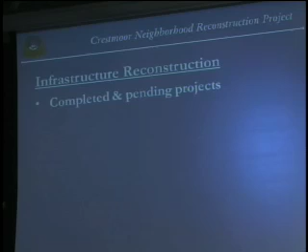Before I get into the projects, I wanted to reiterate something the mayor said. Late last year, the city council had a study session where staff presented recommendations for infrastructure improvements in the neighborhood. Subsequent to that, the council adopted a resolution confirming those improvements, reiterating their commitment that they are rebuilding the community, not just repairing the damage that occurred in the event.

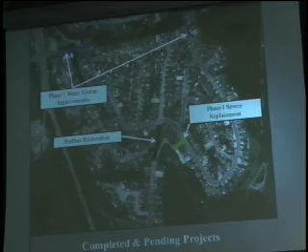So let's take a look at some of the projects. In October, we completed what we called the surface restoration work, which was filling the blast crater and repaving the roadway at Glenview and Earl.

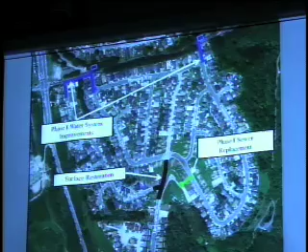In addition, there were temporary safety improvements, including a fence around the canyon, as well as some sidewalk and curb and gutter repairs so the neighborhood was safe for pedestrians to walk through. That work was completed in October of last year.

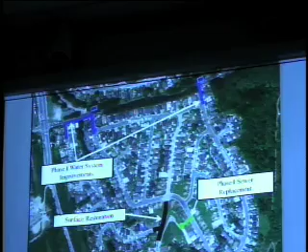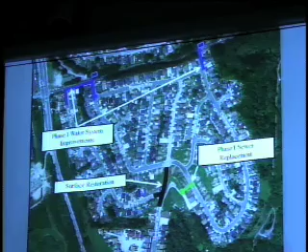We recently completed, at the end of the year in December, what we call our Phase 1 sewer replacement. It was a small project, replacing and upsizing a sewer line between two lots, running from the canyon over to Claremont Drive. That project has been completed.

This project shown in blue is what we call the Phase 1 water system improvements. It consists of new water line upsizing and new water line connections to a water line that's in Sneath Lane.

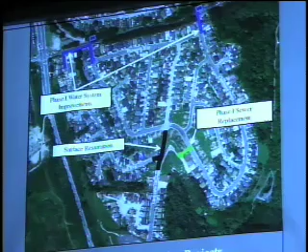In addition, we'll be constructing two pressure regulating stations, one here and one here. The main purpose of the project is to help blend water from the higher water pressure in that line within Sneath down into this neighborhood to help provide more reliable water pressures and fire flows during peak demand periods.

That project will be starting construction in about hopefully three weeks. It'll be about a 2.5-month duration, so it'll be a February through the end of April construction period.

I'll talk a little bit about this later in the presentation. The website that we are unrolling this evening will have information about these construction projects, so you'll be able to go there and get updates on things like street closures or lane closures. These water lines will be within the roadway, so there will be some disruption within the upper portion of Earl at Sneath, within Sneath itself, and within both the upper and lower portions of Claremont.

An additional project completed in the October-November timeframe was PG&E getting into the fire damaged area of the neighborhood and replacing the gas distribution lines, so that all of the homes and all of the lots now have their gas service restored.

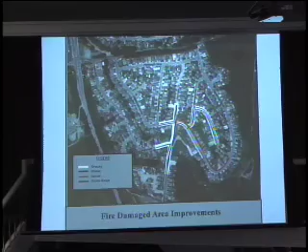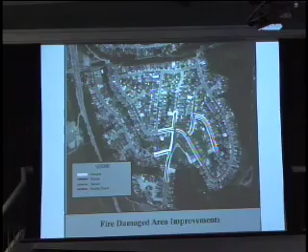For that project, we will not be repaving the roadway at this point in time—we'll be patching the asphalt. We'll come back with a later project when we do the remainder of the neighborhood and do the final lift of pavement. What we don't want to do is do the final lift now and have construction traffic and other traffic tear up that road on an interim basis.

In terms of timing, we think we'll be out in construction in May, and that's probably going to be a May through August timeframe for construction.

Then the next phase of work after that area will be the remaining neighborhood improvements. The extent of the improvements that the council approved back in December was to replace similar utilities throughout the remainder of the neighborhood.

We're talking about upsizing and replacing the sewer lines to current standards, and upsizing and replacing the water lines to current standards. Most of the sewer lines in the neighborhood within the streets are 6-inch, and we're going to upsize those to 8-inch. Same with the water lines.

Where we have drainage issues, we will be constructing storm drain improvements. We'll also be going into certain areas where there are V-ditches or valley gutters that aren't connected properly to a storm drain, and we'll make sure those are connected up as part of this project.

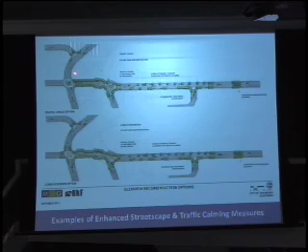By traffic calming, that's a technical term, but what it really means is putting measures in place that serve two purposes: reducing the speed of traffic through a neighborhood and discouraging cut-through traffic. So what we're looking at as potential options are from San Bruno Avenue up to Claremont, looking at doing what we call bulb outs. What bulb outs are is we take the curb and bring it into the street, creating little pockets we can landscape. If you're driving down the road, it tends to narrow the roadway up, and that's a known traffic calming measure—it slows traffic down.

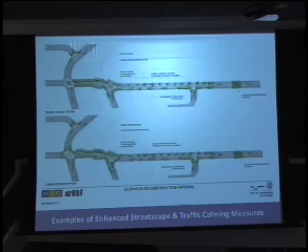The other thing we are looking at is the intersections, where we have two options we think are truly viable. Those are doing bulb outs at the intersections, widening them by flaring out the curb, narrowing them up. We'll still have enough room for cars to travel both directions and for emergency vehicles to travel through the intersections, but it serves the purpose of narrowing that down and slowing traffic through the intersection.

The other option is a combination of a slightly less wide flare out or bulb out at the intersections, and maybe integrating a traffic circle in the intersections. Both options have pros and cons from an engineering standpoint. I'm not going to go into that level of detail this evening, but these are just some examples and ideas that we'd appreciate feedback and comment on from the public, because it's your neighborhood and we'd like to know what you want to see there.

The question was, when do we want those comments? We would love to hear what you have to say tonight. We are rolling out this website, and there's an avenue there for comments. You can put comments on the website, and we have an email address as well. So any time over the next period, the sooner the better is great from a schedule standpoint.

Have you ever walked on the sidewalks in San Bruno? There aren't many of them, but the ones that are there are so narrow that it's scary. Okay, no, thank you.

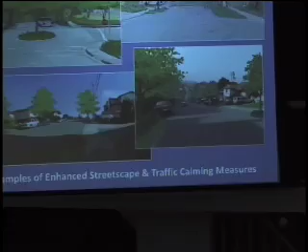Here's some illustrations that show some of the examples. Again, what I was describing earlier, these represent some of the bulb-outs as you would drive down Glenview. And then this would be a traffic circle, actually at the intersection of Claremont and Glenview, looking south.

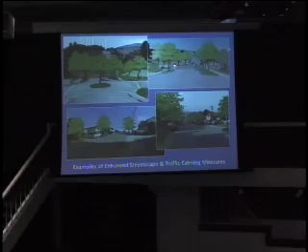This is the enhanced intersection at Earl and Glenview, and this is a potential entrance to the park, or a rebuilt park over there. So these are just some illustrations of what implementing these traffic calming measures could look like.

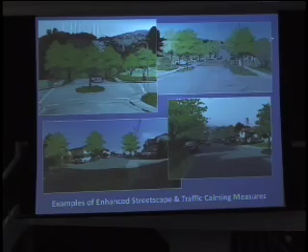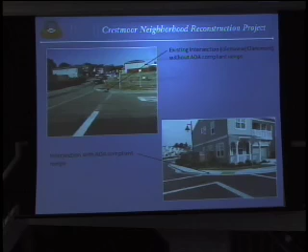The other thing we'll be doing within the neighborhood is, at many of the intersections, there are storm drain facilities right in the middle of what we call the return, the radius around where the two streets meet. Having that storm drain inlet at that location doesn't allow us to integrate and construct current standard ADA, Americans with Disabilities Act, ramps. So one of the goals of this project is to make all of the sidewalks ADA compatible. We will be doing that with this project, and in some locations that will mean doing some storm drain revisions at those intersections as well.

A couple remaining elements are the replacement of the Earl Glenview Park and the replanting of the canyon. In terms of the park, the former park that was there was a small pocket park. I think it had a small play structure in it. The city wants to include the public in shaping the vision of that replacement park.

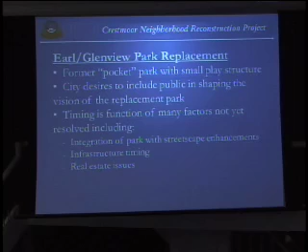Unfortunately, the timing of that is really a function of several different things. I talked about the streetscape enhancements. We want to integrate the park design with those streetscape enhancements, so we really need to figure out what we're doing with the streetscape before we get into a detailed discussion related to the park. Also, some of the infrastructure timing, and then there are some real estate issues as well. So this is something that's definitely on the radar screen, and we will be paying attention to it quickly, but it's not something that we can really delve into at this point in time.

And then in terms of the canyon replanting, obviously everyone is aware that after the explosion and fire, a lot of work was done within the canyon for erosion control and slope stability issues. We have been in discussions with several arborists, as well as landscape architects and geotechnical engineers, related to what makes the most sense to replant in the canyon, and they have come up with some recommendations.

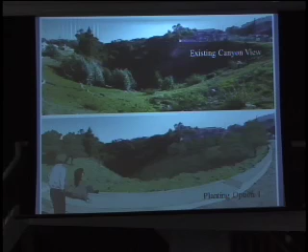What they have recommended is that the planting palette be native species, what they call high chaparral or a coast planting palette. I'm not a landscape architect, so they had to explain to me what that means. What that means is instead of eucalyptus trees and tall pine trees and other things like that, it's more plant materials like live oaks, manzanitas, some of the lower shrubs, that sort of plants.

This is an illustration showing what the canyon looks like now, and potentially what it would look like if you integrated those sort of plant materials in the canyon. What we're seeing here is sprouts coming out of the eucalyptus stumps that are there. The recommendation we have from our geotechnical engineer and the landscape architects is that we allow these sprouts to grow each year, and every spring we cut them down. What we want to do, until we come in with a new planting material, is make sure that those eucalyptus roots stay alive because they help hold that slope together.

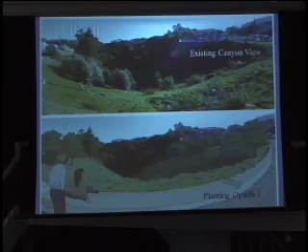The theory is that once we replant the canyon, it's going to take 5 or 6 years for those new plants to establish. We'll continue to let these things sprout on an annual basis and cut them down until the point at which the new plants have established, and then we can go in and actually kill the eucalyptus trees at that point. So that's their recommendation, their recommended option.

The downsides of that are eventually it will regrow to what it looked like before, or similar to what it looked like before, and obviously there are public safety concerns with that, and fire concerns as well.

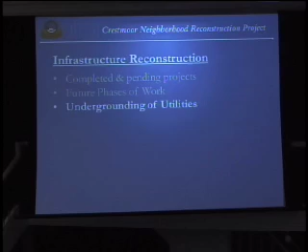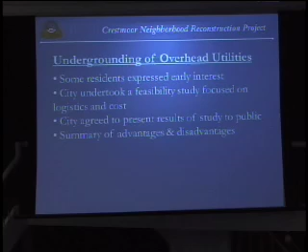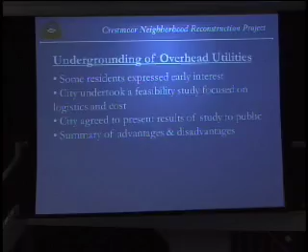So let's talk a little bit about the undergrounding of the overhead utilities, because I know there's been a lot of interest expressed by the residents. Some residents expressed early interest when we started talking about the infrastructure reconstruction, about the possibility of undergrounding the utilities within the neighborhood. So the city undertook a feasibility study focused on the logistics of doing that, as well as the cost. That study was completed late last year, and we agreed to come back and present it to the public. So that's what we wanted to do here tonight - present it in terms of the advantages and disadvantages of undergrounding and talk about some of the logistical issues.

In terms of the advantages, obviously there's an aesthetic advantage in taking those pole lines and putting them underground. Additionally, it could eliminate the need for the public utility easements that are in many of the backyards right now, and the need for utility companies - PG&E, the telephone company, and the cable companies - to come into your backyard periodically to do service and other things. It also would eliminate the possibility of down lines during storms or other events. There are safety issues involved when we have lines down, and service might be more reliable because we won't have as many down lines.

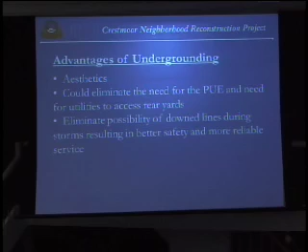Some of the disadvantages pointed out in the feasibility report: there are several lines that run through the neighborhood, particularly the line that comes from the substation here, crosses and goes parallel to Skyline, then cuts across Earl and down Glenview. Those are major transmission lines, both electrical and telephone, and undergrounding those presents a lot of challenges in terms of the size of the structures and facilities that have to be put underground. There's physical disruption that will occur to residents above and beyond the improvements we're contemplating in terms of the sewer and water.

These facilities will go in a different trench - they can't be put in the same trench or near the other utilities. They'll need to go in what's called a joint utility trench. As part of that - I'll show some photos in a minute - there are large underground vaults and junction boxes that will need to be constructed. Those boxes have to go somewhere, and they typically cannot go in the street, so they need to go on private property. There's no room, so to some extent you'd be trading off pole lines behind your houses for these utility boxes and vaults in your front yards.

The cost that the consultant estimated to perform this work is about $11.5 million. Just to put that into perspective, the sum total of the infrastructure improvements for the entire neighborhood - storm drain, sewers, water lines, and repaving work - is probably in the $12 to $14 million range. So this would be an additional $11 or $12 million on top of that.

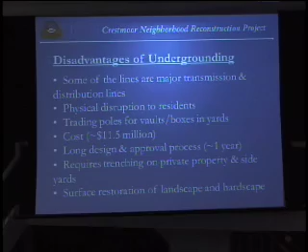So going back to the time frame I was talking about earlier for the neighborhood improvements - if we're looking at starting those improvements later this year, late summer into the fall, we couldn't dovetail these underground improvements into that project. We'd either have to delay those projects for this work to catch up, or we'd have to do a separate construction project in the future for the undergrounding.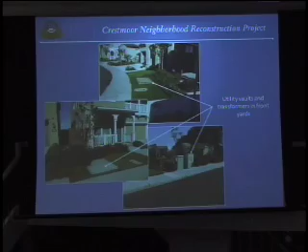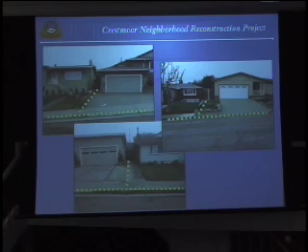Additionally, at each house, because the pole lines are in the back of each house throughout the neighborhood, you've got service drops that come from the pole down to the rear of the house. If we move the utilities to the front in the street, we have to trench through your side yard to the point of connection on your house. Schematically, if the main underground utility trench is within the street or close to it at the sidewalk, we'd need to trench between each house through hardscape, whether paver stones recently installed, concrete retaining walls, or landscaping. So there will be some disruption involved in that as well.

In terms of the undergrounding of the utilities, we wanted to present this information. We promised the public we'd present it back to you. This is one of those items that the city has recently received a letter from many of the residents here who signed it, but we also welcome additional comment on that as well.

The next item, near and dear to a lot of people's hearts, is traffic through the neighborhood. Immediately upon reopening of the roadways after paving Glenview and Earl and opening that up to traffic, we got response from the community regarding speeding and other traffic issues in the neighborhood.

So the city undertook several measures. One was an increased police presence in the neighborhood, some in the evening, some during the daytime. Police have stepped up enforcement and visibility, which has had a noticeable effect. The police department has also installed radar trailers on several occasions, the trailers that say speed limit 25 and flash your speed as you drive through. Those also have a pretty significant effect in slowing down traffic when they're there. Unfortunately, they're not there all the time, and unfortunately the police can't be there all the time either.

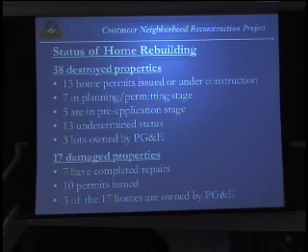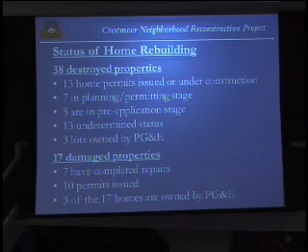There's an additional 7 homes in the planning and permitting stage, and 5 more in the pre-application stage. So roughly a third of the homes are permitted or under construction, a third are in planning and permitting, and about 13 homes have a status that's still undetermined. Of that 38, 3 of the lots are owned by PG&E.

Yeah, actually I was going to answer that on this slide. So of the homes and lots owned by PG&E, there are 3 homes and 3 lots currently owned by PG&E.

The lots are 981 Glenview, 1680 Claremont, and 1641 Claremont.

And then there are 3 homes currently owned by PG&E. One is at 1720 Earl, which is here. One is at 1120 Fairmont. And the other is at 1636 Claremont. I apologize, let me correct that.

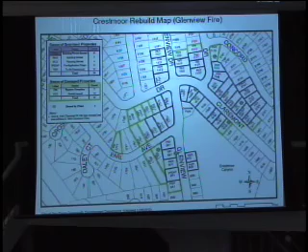The last major item I wanted to inform residents of tonight - we're happy to say that as of 5 o'clock today, we are live with our rebuildcrestmoor.org website. It provides information related to the infrastructure rebuilding that I described. It has a lot of the exhibits we had here tonight, plus many more, including information regarding rebuilding of your homes.

It will also have construction updates on the projects I described earlier, like the Sneath Waterline improvements. It will include updates as we move into future phases of construction, and once we know details about road closures or detours, we can post that information there.

It's also a great avenue for residents to provide feedback and comments back to the city. There's a frequently asked questions page that will currently say under construction, but we're working to get that up quickly. Part of the delay is we wanted to incorporate comments and questions from this evening's meeting.

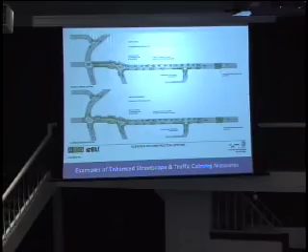That's a very good question. The bulb outs will affect the parking. I apologize because this isn't the best exhibit to see it on, but these are individual bulb outs that are about 20 feet long as you go down the roadway, so 20 foot long is essentially about one parked car.

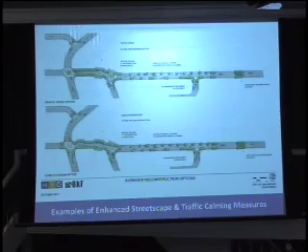The idea behind the bulb outs on this stretch is, yes, it will take away some street currently used or with potential for parking. What it will allow for, however, is one parking space in front of each home. On the west side of Glenview, for this stretch, we don't have houses that front it—those are houses that back to it—so we can open up additional pockets for parking there to help offset some of that.

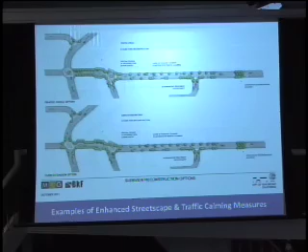In terms of the bulb outs at the intersections, yes, it will impact parking in some of those locations, but you don't really want cars parked close to intersections anyway. So the answer to your question is it will have an impact on some of the parking on Glenview for sure.

Here's a question: what is the safety evaluation of the intersection plans? We've had our consultants come up with these designs. This isn't something new we're experimenting with in San Bruno—things like this have been done in many communities across the country. The engineering design will look at sight distance, speeds, and other factors, so safety concerns will be integrated and addressed in the design.

Next question is related to water safety, i.e. lead, while the water lines are being repaired. I'm not aware that we have a lead issue. The water quality is tested and verified on an ongoing basis, so I don't think that's something we need to be concerned about.

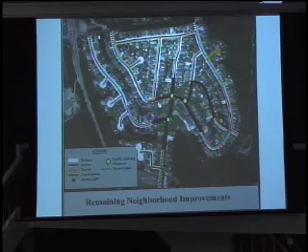Let me get to a map here—Clark, you may need to help with the older portion. I'm not familiar with the 1500 and 1600 block of Claremont specifically, but I know that about 3 years ago a sewer project was done down Earl, and that sewer line was replaced, extending over into the canyon to these manholes. I believe some sewer line work done here was part of that same project—the line was repaired and replaced up to about where that black line ends. So that portion of the sewer is in good condition and won't need repair, but we'll be doing the remainder of the sewer lines in the neighborhood.

Can other areas of the neighborhood be considered for traffic calming measures? For example, traffic speeds down Plymouth Way to bypass Sneath Lane during peak periods.

Fortunately, Glenview and Claremont are wide streets, well suited to integrate traffic calming measures like the bulb outs we discussed. Traffic calming measures on narrower streets are harder to integrate. A lot of people jump to speed bumps or speed humps, but unfortunately those aren't good, effective traffic calming measures—they have many downsides, and your police department, fire department, and emergency vehicles don't like them at all since they really slow down response times. So it's a struggle to find a good, effective traffic calming measure for some of those narrower streets.

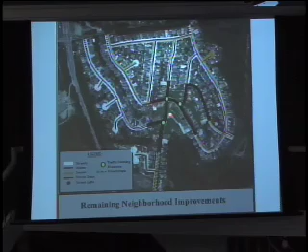I think that's it for my questions, Connie. One more question.

Let me elaborate on one of the last questions that Harry just answered about traffic calming on Plymouth, one of the narrower streets in the neighborhood. There are a variety of different ways we look at for traffic calming: bulb outs and traffic circles, and physical narrowing of the roadway, as Harry has discussed tonight. There are other measures that include striping, signage, and speed alerts. We can certainly look at the specific issues occurring on that street, and as necessary on other streets, to see if there are other ideas that might be utilized.

There were a couple of questions I wanted to address regarding PG&E owned lots. We have maintained as best we can an ongoing awareness of PG&E real estate transactions, but we're typically not privy to negotiations or preliminary discussions with any of you or your neighbors who might be considering selling a lot or home to PG&E, so we generally find out after the transaction is completed. Harry articulated what we know: the 3 lots and 3 homes currently owned by PG&E. The questions appear to be encouraging sooner rebuild of those lots—specifically, can the city get the PG&E owned lots sold to private individuals so planning and building can start sooner? And also, does San Bruno City have the right to force a rebuild?

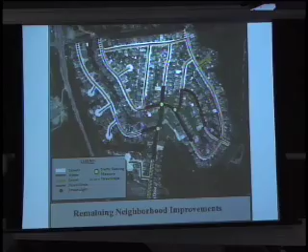The status of the canyon is that, as you can see in the picture, and you can only see a small portion of the canyon, this is a much larger issue than is immediately related to the rebuild of the neighborhood. It is not currently... well, let me back up.

The fire department, in conjunction with our park staff and various state agencies, does on an annual basis review the mitigation needs within the canyon, and has been active in the past several years on an area-by-area basis doing work to thin what would probably be classified as the most high-hazard areas. In addition, we annually do work in the bottom of the canyon to make sure the area is passable for emergency apparatus, in case there is a need to take further action on some sort of wildfire.

The short answer is that at this point, the Glenview infrastructure, or rather the Crestmoor neighborhood infrastructure rebuild, does not envision treatment of the entire canyon beyond that which we ordinarily do in order to address the potential for fire hazard.

Prisoners and chainsaws to clean it out in a week? That's exactly what we do. Could we clean it out in a week? Absolutely not. Is the fire chief here? Yes, I believe about a year or two ago we did a fairly small area behind Crestmoor School on the other side of the canyon. That was a significant, week or 10-day long project, but we do coordinate with CAL FIRE, who are able to coordinate work crews to do the work as I've described.